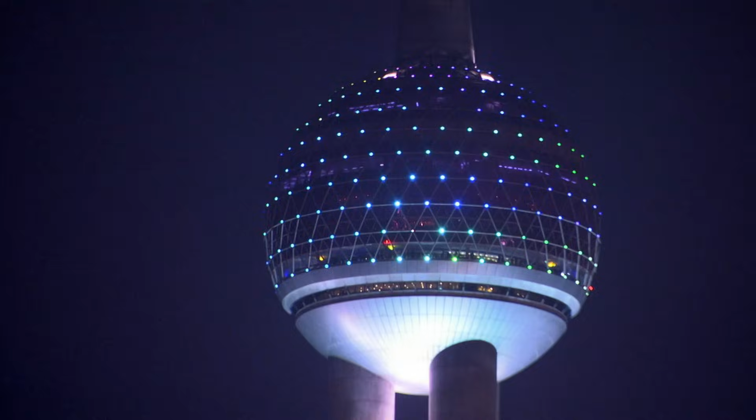China. For thousands of years, it's proclaimed its greatness and power by erecting some of the greatest monuments on Earth. And as China roars back to world power status in the 21st century, it's once again proclaiming its power in steel and concrete, glass and stone.

But even in today's China, it doesn't get any more amazing than this. In Beijing, China's capital, workers are constructing one of the most astonishing buildings ever built. When Beijing lights the Olympic torch, the eyes of the world will be on the incredible National Aquatic Center, a gigantic greenhouse that heats and cools itself, with a skeleton so strong it could stand on end and shrug off an earthquake, and a wafer-thin skin that puts out its own fires.

Can you imagine building a building out of this? Essentially, we're building a building out of bubble wrap, you know? I have to say it's perfect.

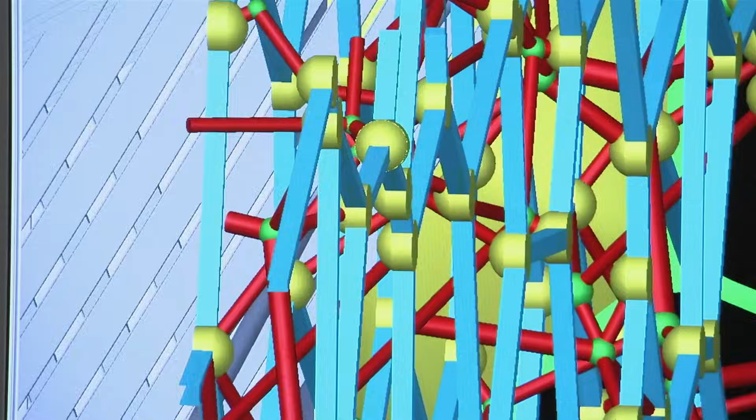What the Olympic crowds won't see is the sweat, brains and guts that got this megastructure built. The struggle to believe in the incredible. I think we're all a bit stunned, really.

But you want to do what? The lives put on hold. My wife didn't want to speak to me for a while.

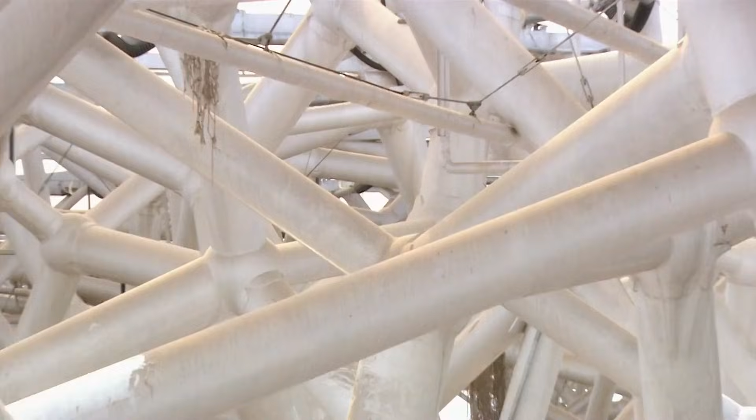And the hard hat high wire acts 30 meters high. It looks a bit crazy, but it is safe. The National Aquatic Centre's a visionary piece of eco-architecture and a brilliant monument to 21st century China. And it's also a tribute to a team that conquered fear and doubt and didn't quit until they'd made the impossible a reality.

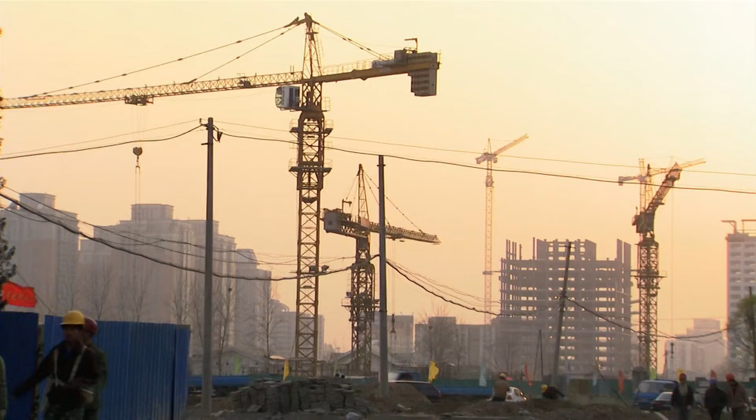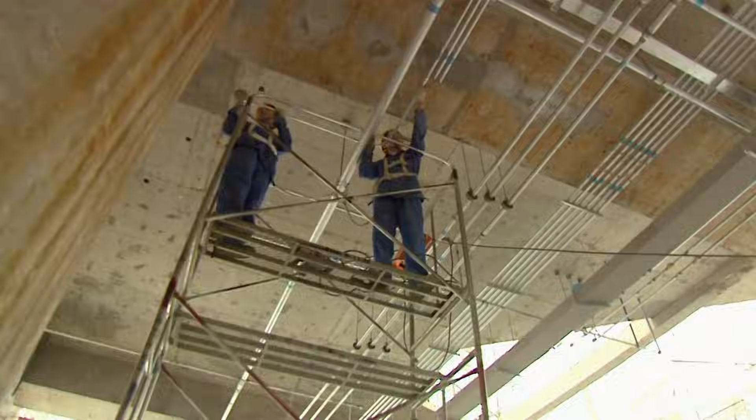Beijing. Building materials arrive at a construction site. Hardly unusual in this construction-crazy town. But these building materials and this building are different. Really different.

90 kilometers of steel, 22,000 beams, following no conventional straight lines, a maze of metal. That's enough steel to circle more than 200 Olympic running tracks. And it's covered with plastic, 100,000 square meters of it, enough to cover 14 full-size rugby pitches, cut into cushions as big as 9 meters in diameter, but only 0.2 of a millimeter thick, nearly 8 times thinner than a penny.

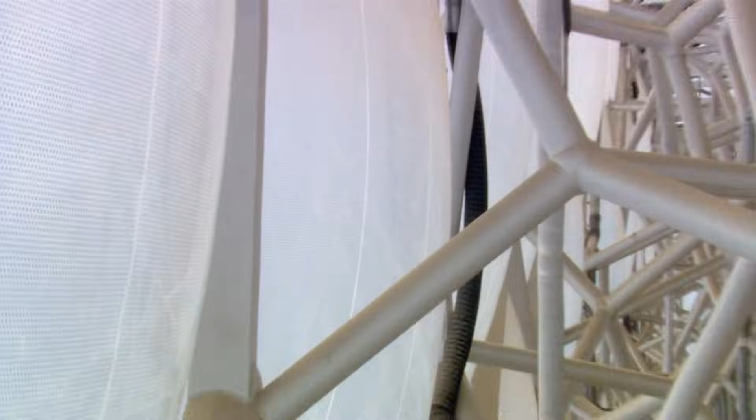Officially, it's called the National Aquatic Center, but in the world of mega architecture, it's known as the water cube. It's a fantastic honeycomb that looks as light and fragile as a tinker toy. But in reality, it weighs 6,500 tons. That's almost as heavy as all the metal in the Eiffel Tower. And inside its walls and ceiling, nothing but air. There is nothing else like it.

Who came up with this amazing building? Engineering team leader, Tristram Carfrae. Architects John Bilmon, Mark Butler and Chris Bosse. Fire engineer Marianne Foley. Structural engineer Mark Arkinstall. Building modeler Stuart Bull. Environmental engineer Haico Schepers. Chinese design team project manager Yi Hongtao. Part of a 100-strong architectural and engineering dream team. A team that envisions the original, the astonishing, and the apparently impossible, and made it into a megastructure.

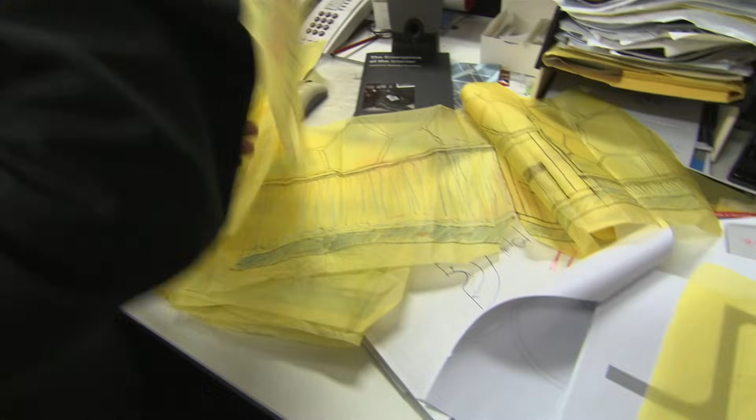Sydney, Australia, 2002. The architectural firm of PTW and the structural engineers of Arup Australia team up with a Chinese consortium led by China State Construction Engineering Corporation and go after one of the world's most coveted construction contracts. From day one, the pressure's on, because they're literally racing the clock. A giant clock in Beijing's Tiananmen Square, counting down the hours and seconds to the 2008 Summer Olympics.

China has invited the world's greatest architects and engineers to transform Beijing into an Olympic host city like none ever seen. The Chinese-Australian team's goal: to design and build the Olympics' prestigious swimming venue. And right away, they run smack into a heart-sinking challenge. The Olympic National Stadium, aka the Bird's Nest. A mind-blowing masterpiece only 1 kilometre from the site where the swimming centre would stand.

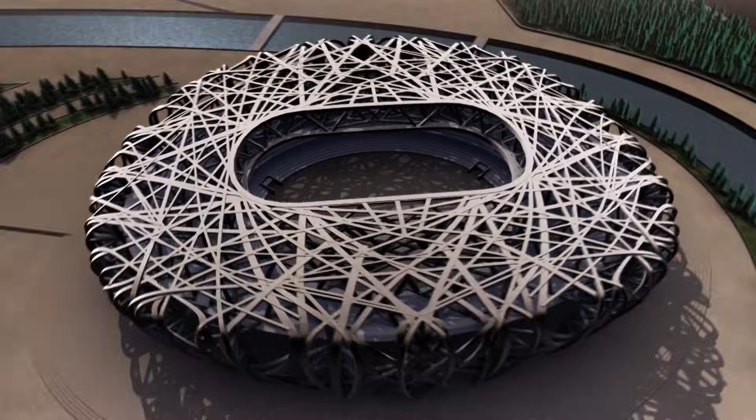When we saw the stadium design, I thought, oh, jeez, how can we match this? We were going to set our aims to create a building that was equal to the stadium, and then we saw the stadium design, and I think all our hearts fell on the ground for that moment. We just thought, oh.

The team searches for a design that will knock the judges' socks off, and searches, and searches, and searches. Then, after nearly six weeks of failure, and with the competition deadline looming, comes the eureka moment.

Soap bubbles. Despite their random appearance, soap bubbles always cling together in regular patterns, in 12 and 14-sided cells, nature's most efficient division of space. And despite their flimsy look, an infinite array of connected soap bubbles has a geometry that's just right for a high-tech building, strong enough to be the model for a megastructure.

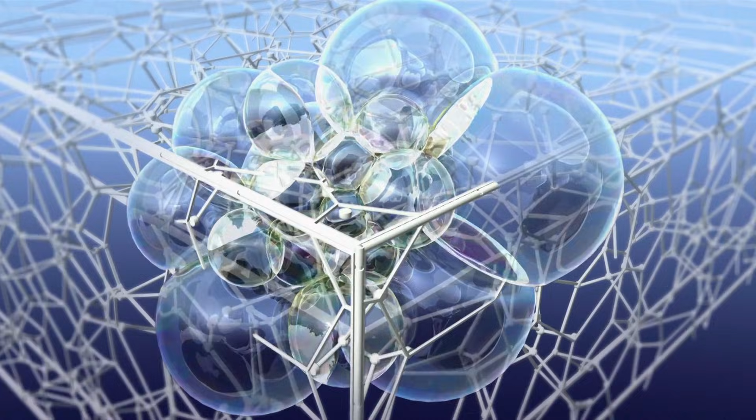Three soap films always come together at 120 degrees, like a Mercedes symbol. And along that line, where the three films come together, there is an axis that we can use as a piece of structure. So we can put a pipe down that line. Those lines always join four to a node. We can stick a joint in, pull in three more pieces, and we get a structure.

At last, the team has a design bold and original enough to win the competition. What they don't have is time.

I probably slept two or three hours a day. I took a nap when I felt tired, and an hour later I'd get up to work. Almost everyone in our team was the same. Everybody's eyes looked like rabbits, very red.

We had tremendous pressure. After we agreed on the Watercube's design, we had five weeks to prepare a building of this complexity. It was extremely hard.

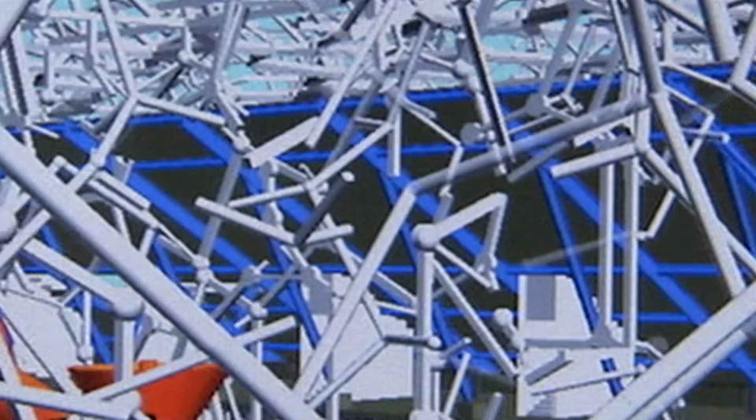Hardest of all was making a model to show the judges what the finished building would look like. No one knew if modeling such a complex building in only five weeks was even possible. We were desperate at the time. We had two weeks to go, and we did not know how we were going to make our model.

In Melbourne, they find a company that's at least willing to try. ARC Australia specializes in a process called rapid prototyping, using a computer-guided laser to carve a model of a new product out of a vat of liquid epoxy, etching it in layers only one hundredth of a centimeter thick. Over the years, most of its clients have asked for models of products like water jugs, toothpaste tubes, and auto racing helmets.

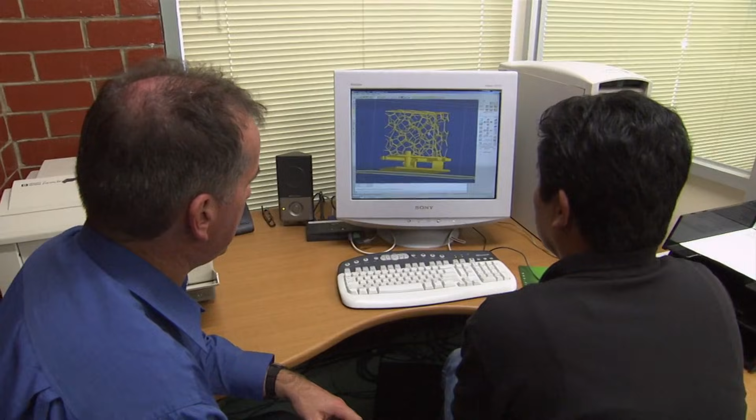Then, in 2003, prototype manager Peter Lucas gets an urgent call from the Watercube team. They'd spoken to other model makers who said they couldn't make this design, so they approached us — it was really their last port of call as far as getting a model made. We wanted to do it because it was a difficult model, something a little different from the normal day-to-day jobs we do.

But within a few days, ARC is pondering that old saying, be careful what you wish for, you might get it. The machine kept crashing. The file was so big, it was like a 20-meg file, and most files we're dealing with are sort of 2 to 5 megs. The darkest hour was when we thought, no, we can't do this.

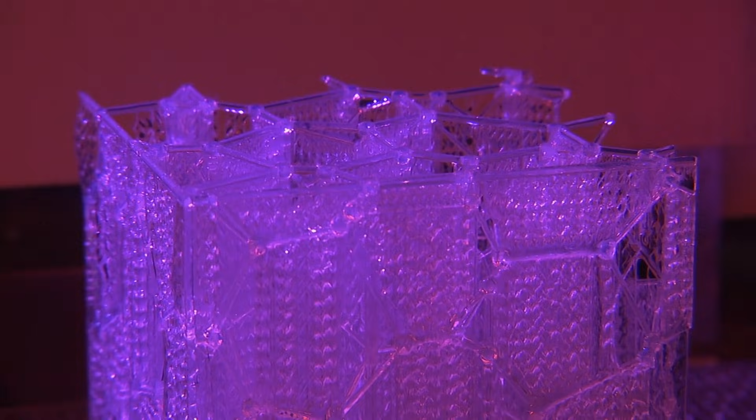So what we decided to do was to grow the Watercube in sections. The architects at PTW came down with hand luggage, and we loaded each section into the hand luggage, and they flew it back to Beijing. I think the time pressure was down to hours at that stage.

The finished model just meets the competition deadline. The team waits for China's decision. They know that losing will be hard, but they also know that winning — and having to build something never built before — might be even harder.

July 2003. After nearly four months of seven-day weeks, working day and night, the Watercube team gets the news. Voting online, the Chinese people have picked the Watercube design to be the Olympic swimming center.

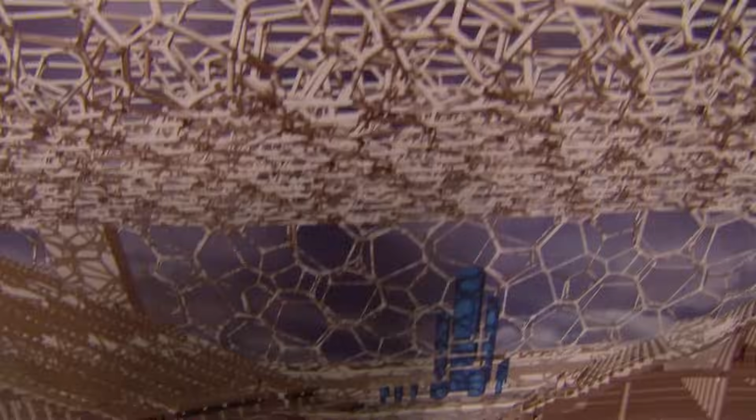The team's reaction: rejoicing, followed by panic. It was really only when they came back from the competition and actually had some images that it hit them — this is what it's going to be. I think we all had in our minds that it was some sort of simpler swimming centre.

I think we're all a bit stunned, really. Like, you want to do what?

There's been an immense effort to win. And when you're in a winning mode, you don't necessarily focus on all the difficulties that are ahead. You want the job — you've won the job — we sit down, we look at it, and there is a bit of a heart sinking, in a sort of, oh my God, can this actually be done?

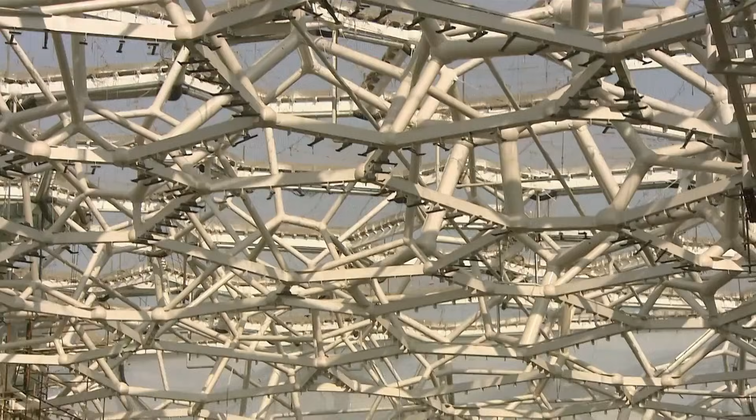And in fact, Chinese authorities were asking the same question. China had voted for a building like no other. Now its designers had to prove they could actually build it.

The Watercube's gigantic steel honeycomb had 22,000 steel beams, following no conventional straight lines — a crazy-looking pattern.

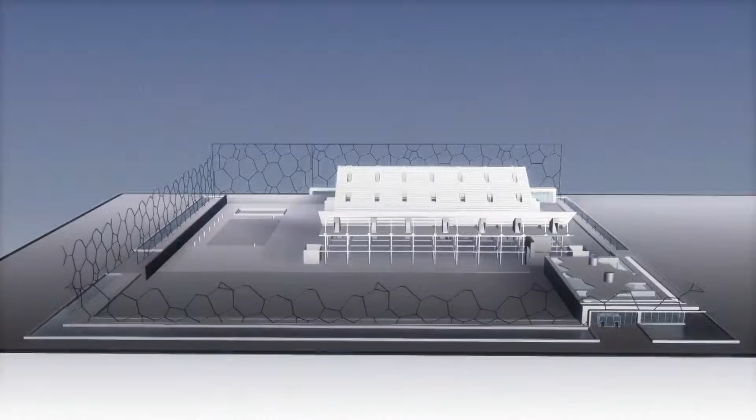Its roof and walls would have to be 100,000 square meters of bubbles, made of something light enough and flexible enough to cover this apparently random maze of steel, but strong enough to stand up to Beijing's desert sandstorms, broiling summers, and sub-freezing winters.

Glass — too heavy and brittle. Concrete — a design disaster. The answer came from way outside the box.

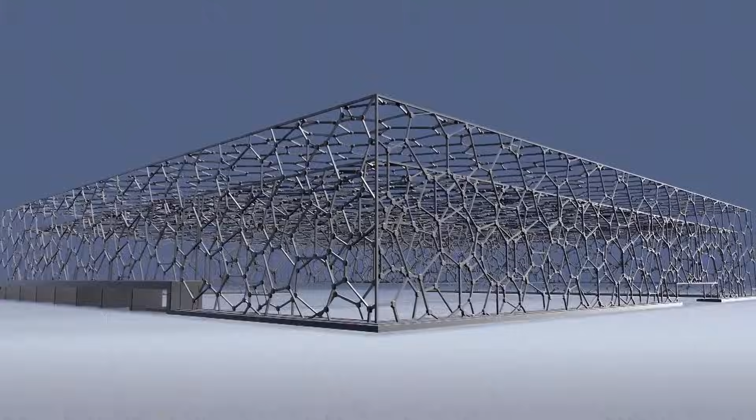Meet the amazing ETFE. That's a piece of ETFE. Fantastic, isn't it? Can you imagine building a building out of this?

ETFE stands for ethylene tetrafluoroethylene. Chemists call it fluoropolymer, the rest of us call it plastic. Essentially, we're building a building out of bubble wrap. It may look like freezer wrap or a dry cleaning bag, but ETFE is a plastic like no other. A plastic with a past.

In 1938, an American chemist at DuPont Chemical Company was experimenting with gases and accidentally created a new substance, known around the world as Teflon. Since 1960, Teflon's helped millions in the kitchen. But most people have no idea it hasn't always been a labor-saving coating on their frying pans.

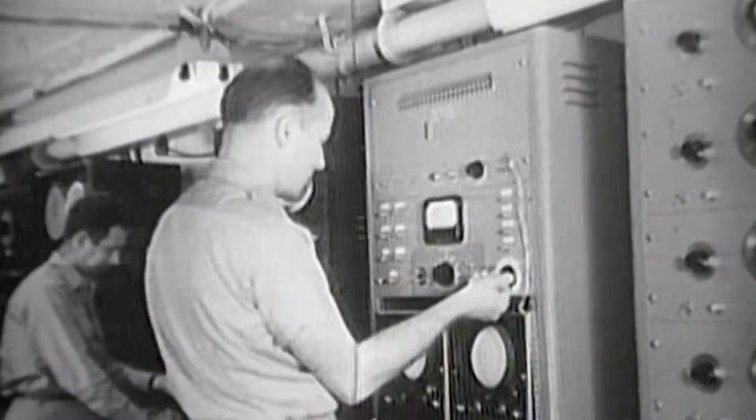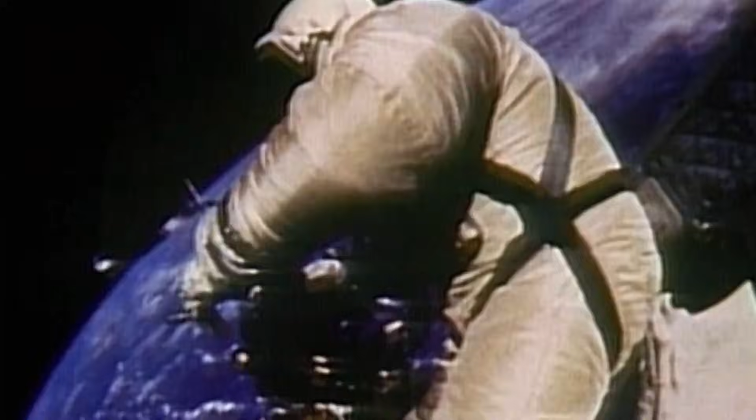By 1970, America was sending spacecraft and astronauts beyond Earth's atmosphere and needed to protect them against cosmic radiation. So NASA and DuPont tweaked Teflon's chemical structure and created ETFE. The 1960s and 70s also saw the rise of the geodesic dome and other architectural innovations, and it wasn't long before architects and engineers grasped ETFE's potential. The miracle plastic that had once helped transform cities into rubble would now help transform them into futurescapes.

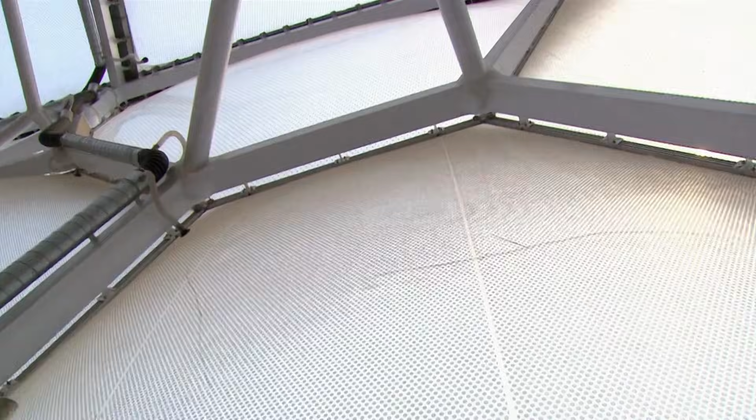The sun's ultraviolet rays can't hurt ETFE. Samples created decades ago still look brand new. It's just 1% of the weight of glass and much more flexible. Incredibly, it's also more transparent than glass and lets in more light. And thanks to its space-age origins, it's a superb insulator.

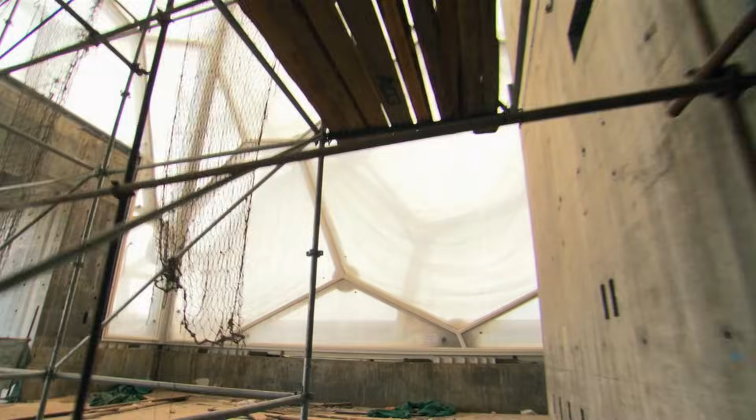Today, ETFE covers some of the world's most impressive structures, like the Eden Project in Cornwall, England, and Munich's Allianz Arena, host site of the 2006 World Cup. But the Water Cube's 100,000 square meters sets the record as the biggest ETFE construction in the world. An impressive statistic that worries Chinese officials. They ask, what will happen if 100,000 square meters of plastic catches fire, with 20,000 Olympic spectators inside?

To win approval for ETFE, Arup's lead fire engineer, Marianne Foley, has to change some minds fast. And the first mind she has to change is her own.

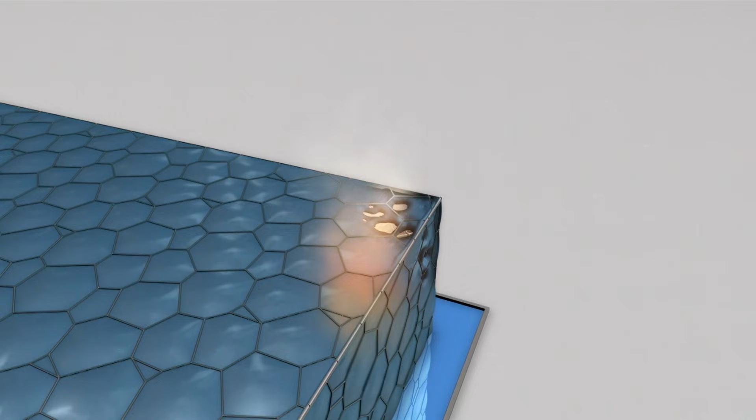When I was first presented with, this is what we're going to do, it's like, you've got to be kidding, you're going to cover the building in plastic. Because, obviously, my thoughts were the typical ones - there's going to be huge flames licking up the side of the building, and that's not going to be good. We all got visions of what plastic may do in the event of fire, envisaging big fires and raining flaming droplets down. And there's plenty of material, plenty of plastics that behave like that.

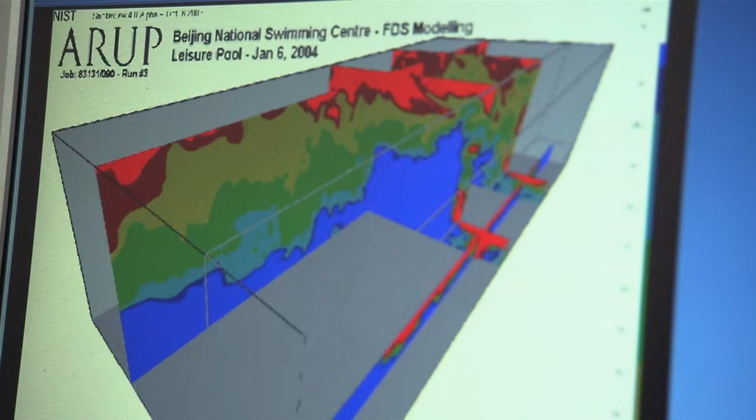But Foley soon discovers that ETFE doesn't behave like other plastics. She researches the worst-case scenario - a fire in the Water Cube with some 20,000 Olympic spectators inside - and asks, what will those 20,000 people see? You're not going to see what the movies show you, for example, of flames licking up the outside of a building, the towering inferno kind of stuff. You're not going to see any of that. I mean, the likelihood actually is you would see nothing at all, which is a terribly boring answer.

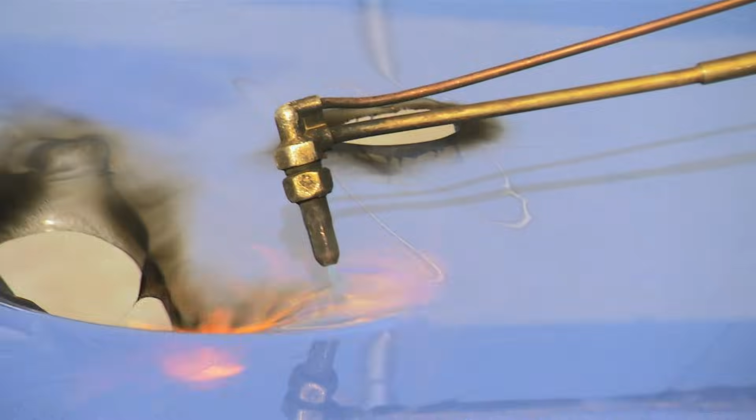Inside the cavernous Water Cube, flames will have a hard time reaching the ETFE skin. But what if they do? At the Water Cube's ETFE factory in Beijing, a demonstration reveals what will happen. If a fire does reach the ETFE skin, the skin won't burst into flame. Instead, ETFE will just melt away. But only as long as the flame stays on it. Take the flame away, the melting instantly stops.

It looks like magic, but ETFE expert James Murphy knows it's just good chemistry. ETFE has a chemical in it, fluorine, sort of like the chemical that's in your toothpaste, and that puts out the flame. The fluorine in the ETFE prevents enough oxygen from being present to sustain fire.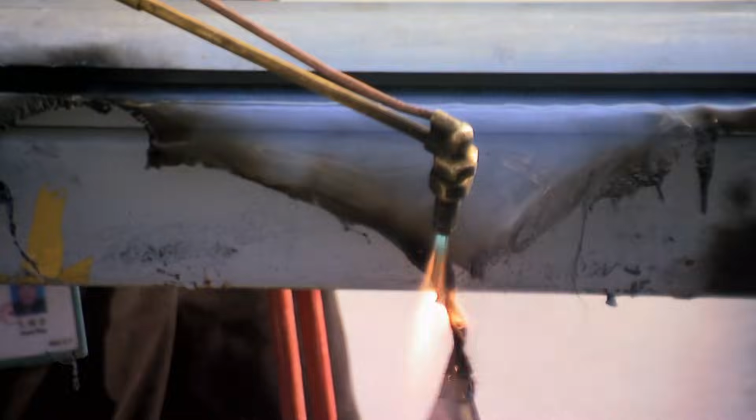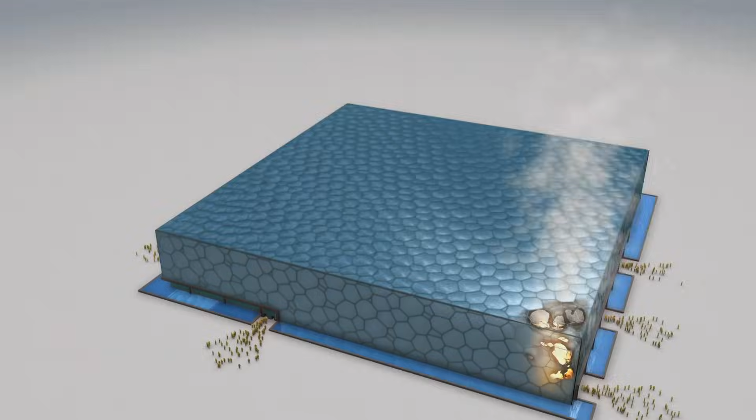No matter how long fire touches it, ETFE doesn't burst into flames. It melts and drops away. That's a big benefit because it allows all the harmful gases and smoke out of the building, and that allows people to see and get out safely. What you're essentially going to see is what looks like a very large piece of cling wrap shriveling away from a lighter flame. It's just going to shrink away, and you're just going to get a hole, and then people evacuating.

The design team proves that if the Watercube's skin caught fire, it will simply wrinkle up and blow away. But what will happen to its immense steel skeleton? A fire can make steel so hot it weakens and gives way.

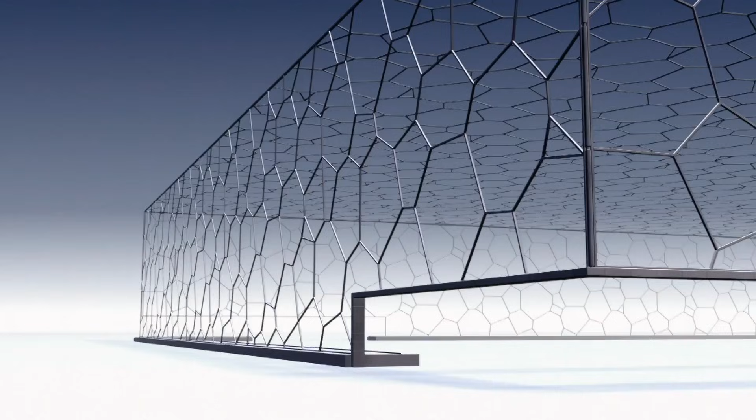China's fire code requires spraying steel with a fire-resistant chemical coating. Very effective, and very ugly. The team argues that given the building's vast amount of visible steel, fireproof slurry will make an Olympic masterpiece look like a gigantic bowl of porridge.

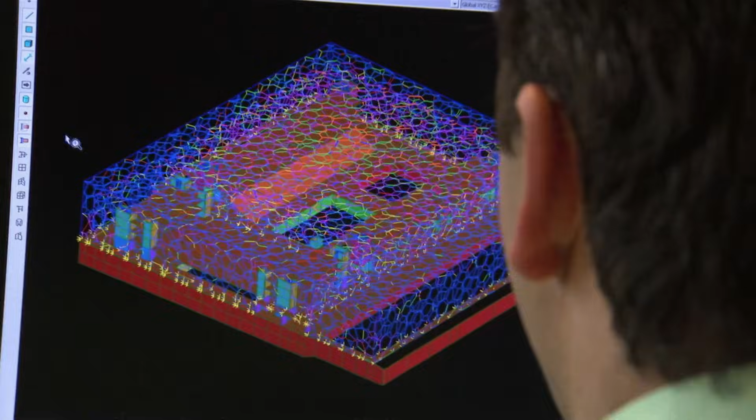It's a terrible material, actually. The idea that we would have had to do that to that building just makes me laugh, because there's just no way. But to win that argument, the Watercube team has to prove that their steel honeycomb will survive a fire on its own.

And that means burning some midnight oil. In here we have the problem with the two beams. We had to look at how fires in the building would affect this very intricate structure. That level of complexity was not something I'd done before, and it's not something you would normally do.

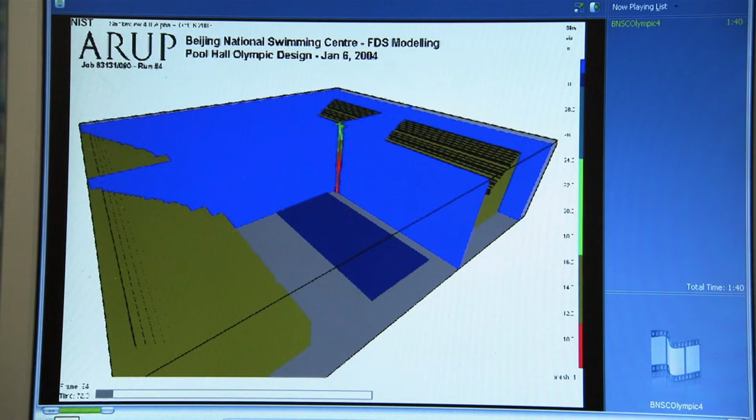Foley painstakingly analyses the Watercube's design to determine where fires are likely to break out and what part of the building will be most vulnerable to fire, while her fellow engineer, Mark Arkenstall, calculates how strong the steel frame will have to be to withstand a fire without a protective coating. My role as fire engineer was to work out what sort of fires we could have, how big they were going to be, how close to the steel they would get, and from that work out what the temperature distribution would be.

So what temperature was it going to be where on that steel? Then Mark took over from there and worked out what that would do to those elements exposed to the high temperature, and where that temperature was such that the element would no longer carry the load. If that stopped doing that, what did the rest of the structure do?

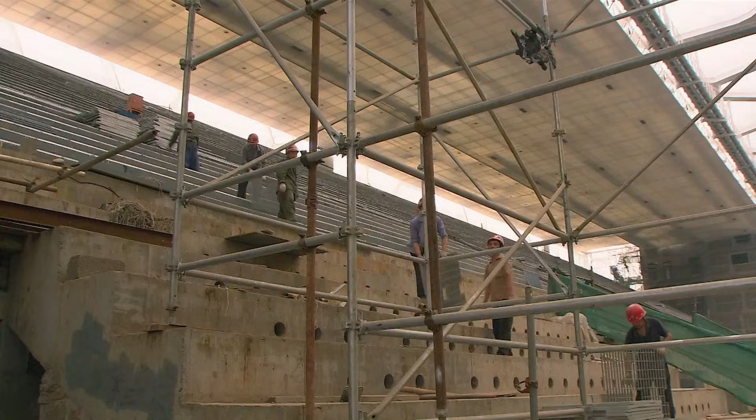To their vast relief, this analysis reveals that the Watercube's steel honeycomb will survive a major fire. If any beams melt in extreme heat, the surrounding beams will shoulder the load and keep the building from collapsing. 20,000 Olympic spectators inside the Watercube are now looking safer.

But the Watercube still has to satisfy one more fire regulation, and it's another potential design wrecker. The Chinese fire code requires a building holding 20,000 people to have 200 meters of exits, nearly the same length as two sides of the Watercube. The code also requires public buildings to have fire-protected enclosed spaces like stairwells leading to fire exits. But the Watercube encloses nothing—inside, it's a vast open space.

So the design team goes back to the drawing board and goes the extra mile to convince authorities that their design is safe.

Even though tests show that ETFE will melt, not burn, and will allow smoke to escape a burning Watercube, Marianne Foley models the probable pathways smoke and flame will take and positions sprinklers and smoke extractors along those routes to make doubly sure that fires will go out and smoke will be sucked out of the building.

She argues that with these extra safeguards in place, enclosed escape routes and 200 meters of exit doors aren't necessary or even effective. People don't actually use those. They don't like them, they don't know where they go, they're afraid of them. We all like to leave a building the same way we came in, or at least a way we've mind-mapped, so we know how to get out, we know where we're going to go, we know what it's going to look like.

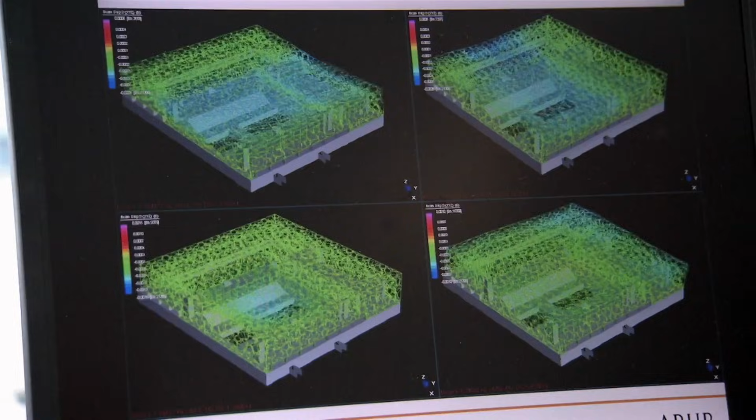But fire isn't the only thing the authorities were worried about. Can the Watercube's gigantic honeycomb survive in one of China's deadliest earthquake zones? There will be plenty more long days and sleepless nights to come.

In 1976, a single earthquake killed 240,000 people, only 180 kilometers from Beijing, where the Olympic Swim Center will stand. With the Olympic countdown clock ticking, the heat is on to prove the water cube can survive an earthquake.

And engineer Mark Arkenstall is definitely feeling that heat. From a structural engineering point of view, we had to be confident that this very complex building would stand up in Beijing with earthquakes, wind, snow, you name it. And it's not just like designing a warehouse. It's actually the water cube. It's just so much more than anything you'll ever see anywhere.

The challenge: how to make the water cube's steel honeycomb strong enough to stand up to high winds, dust storms, snow, and earthquakes, but light enough so it won't collapse under its own weight.

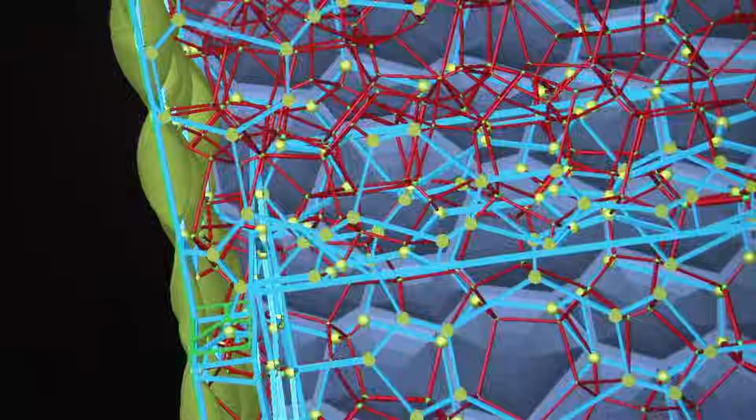After cyber testing 190 different scenarios, the team proves that despite its resemblance to the world's biggest Tinker Toy, the water cube will fare extremely well in an earthquake.

Most big structures in earthquakes resist the forces simply through strength. What happens is that the ground shakes, there's momentum or inertia in the building, and so it has to move with the ground that's shaking, and that creates enormous forces or stresses in the building.

In our case, what we get is that as the ground shakes, the structure goes plastic, that is, the steel begins to yield, it moves the force onto somewhere else. So it redistributes within itself. In fact, the water cube's 22,000 steel beams and joints give it a greater capacity to absorb an earthquake's energy, probably more than any other building ever built.

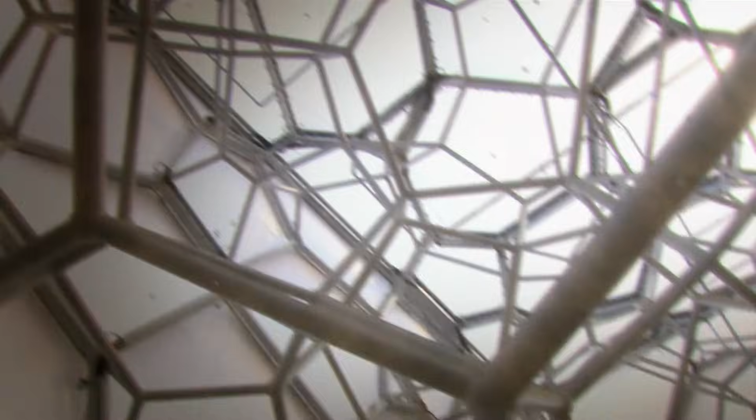But one more challenge remains. The water cube's builders need a 3D computerized blueprint, a virtual model that assembles the entire building in cyberspace.

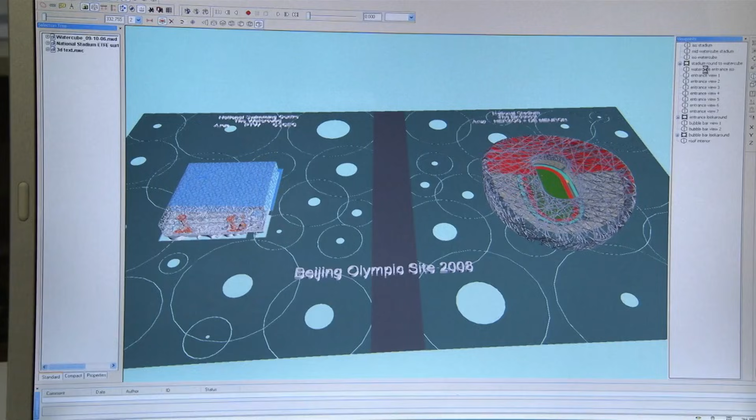It's up to building modeler Stuart Bull to make that happen. I was scared silly. I knew that as the job went further, it would get harder for me personally. Bull has 7 months to accurately model the water cube. That may sound like a lot of time, but not for a building made of 22,000 irregular steel beams.

You then have the stress and thinking, right, I've got to get that done. I've got to get that done now. Why doesn't this work? Go back to the beginning. You get it to work the first time, but it doesn't work the second time. Why doesn't this work? We broke so many computers, they physically stopped working. It was not funny. My wife didn't want to speak to me for a while—just puts me away in the spare room and says, well, you can come out when you're finished.

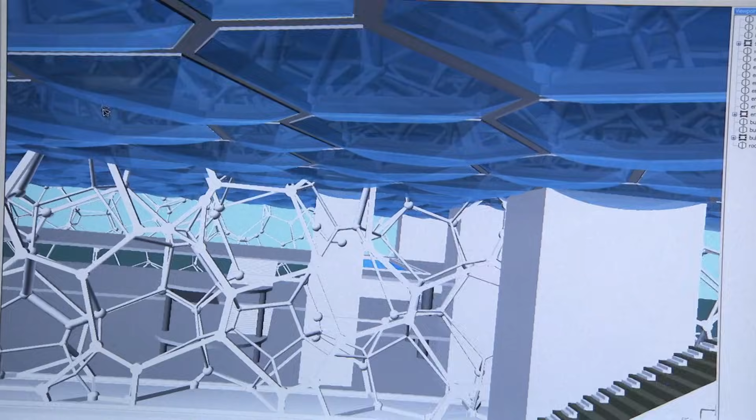Several months and several dead computers later, Stuart Bull is out of the spare room, and the water cube's builders have accurate blueprints. Now, they have to build it.

Construction starts in December 2003. Workers pour the immense foundation, then begin assembling 22,000 beams of steel. It's a mega challenge, and they tackle it head on.

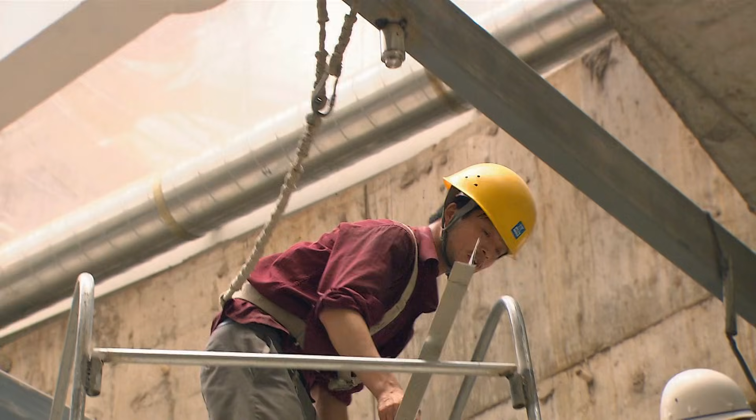The steel structure is very difficult. There are tens of thousands of parts and link points, and you have to put all this together and precisely position them. Because we use high-strength steel instead of usual steel, it became unusually demanding for the welding job. We need to make sure of the quality of welded joints to prevent collapsing.

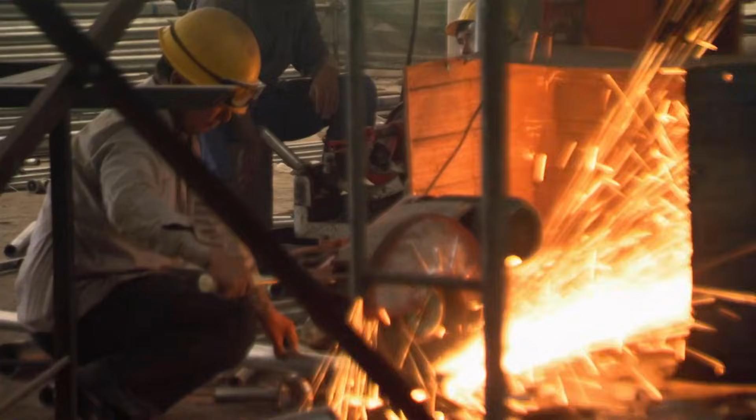If the water cube was to be built in Australia, the UK, or America, the builder most probably would have taken a modular approach, building large segments of the structure and lifting them into place, then welding the seams together. However, in China, an army of welders and workers simply put the beams together, and the structure literally rose out of the ground and marched up the walls and across the roof and down the other side, and then it was built.

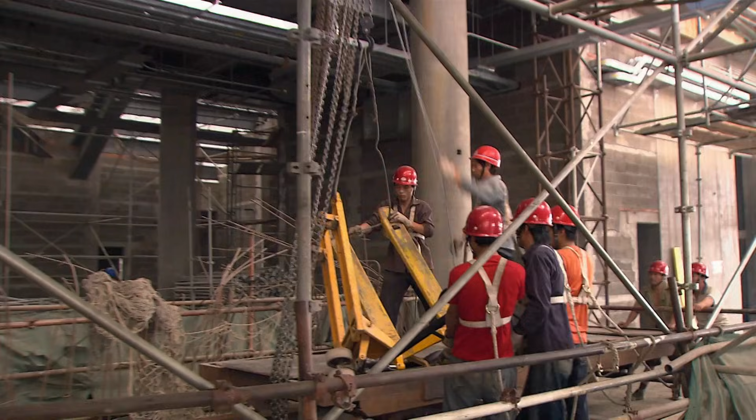By August 2005, the water cube's gigantic steel lattice looms above the Olympic green. It's time to cover it with ETFE. While building its massive skeleton calls for heavy lifting, manufacturing its super thin, super light skin requires some serious mental gymnastics.

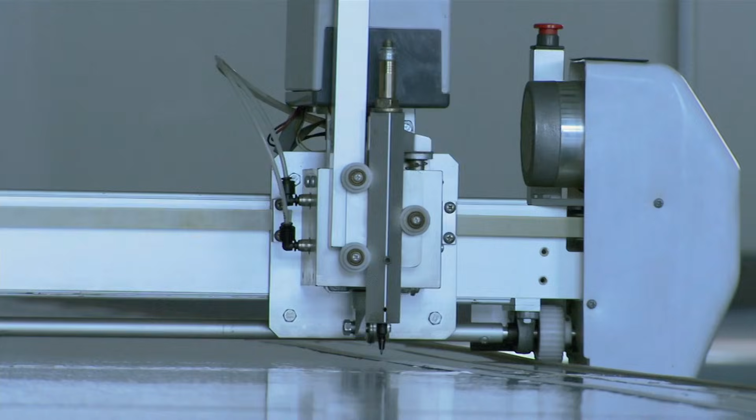At this Beijing factory, workers are transforming huge sheets of ETFE into 3,500 water cube pillows, every one designed in Germany.

In Beijing, technicians translate each pillow's unique dimensions from a German computer program to a Chinese database, calculating how to cut each piece of ETFE with the least wasted material. Other workers stretch huge sheets of ETFE over a giant vacuum table, sealing them flush with the surface. Then the computer program guides a blade as it cuts each pillow to its exact dimensions.

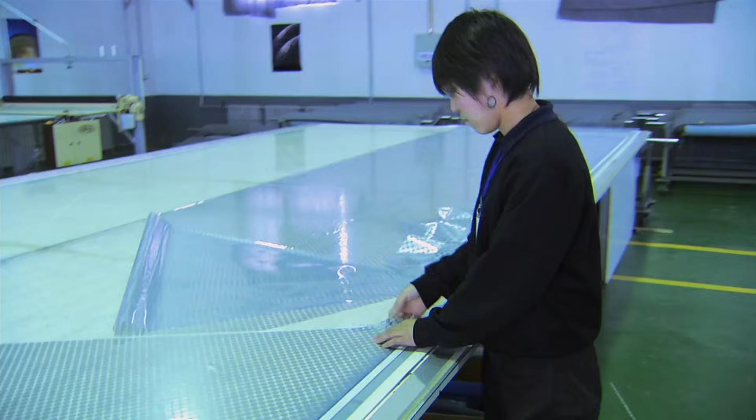Every finished pillow must be exactly as it was designed. For factory owner Stefan Lienert, that meant some sleepless nights when manufacturing began.

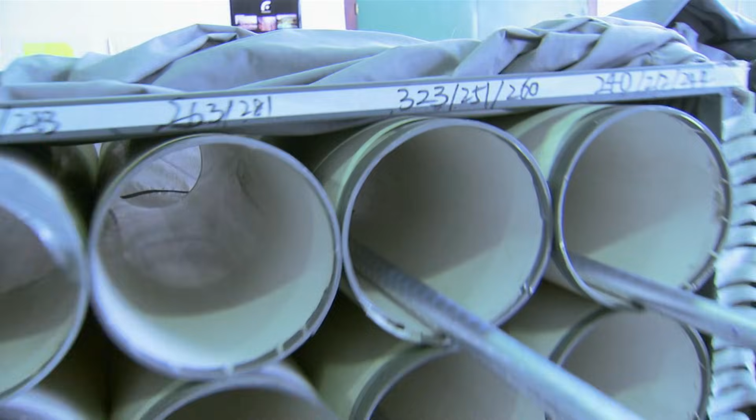The thing is to have these cushions, every one of them, manufactured to the precise dimension, have it done on the right day, in the right position, for the team to be installed in time. If there was one thing wrong, it would have been wrong for every single cushion, which would have been a technical disaster, but also a financial disaster. Luckily enough, our programs seemed to be all right, so everything did fit. Out of the 3,500 cushions, we had to do one new cushion, because we did make one production error.

From the moment they're cut to shape, keeping track of the pillow pieces becomes an obsession. They're numbered to match the water cube blueprint and stored in identically numbered bins. Workers weld a rope into each pillow's edges so that they can be clamped into an aluminium frame.

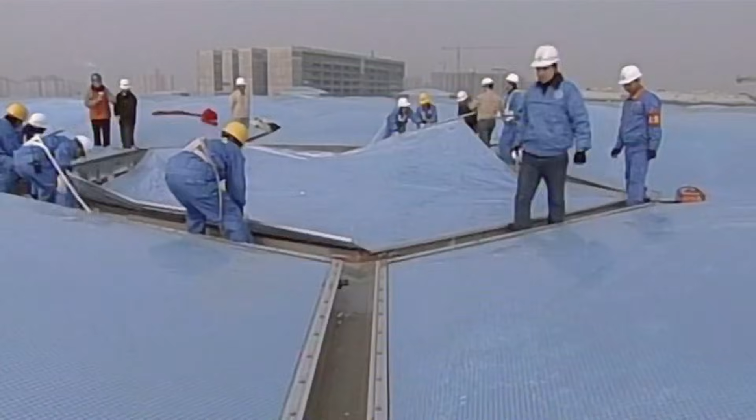Last step, quality control. The factory tests, installs and inflates every pillow. If anything's wrong, now's the time to find out, before it's delivered to the water cube. Every mistake costs time, and time is running out. Installing the water cube's 100,000 square meters of ETFE pillows isn't any easier than making them.

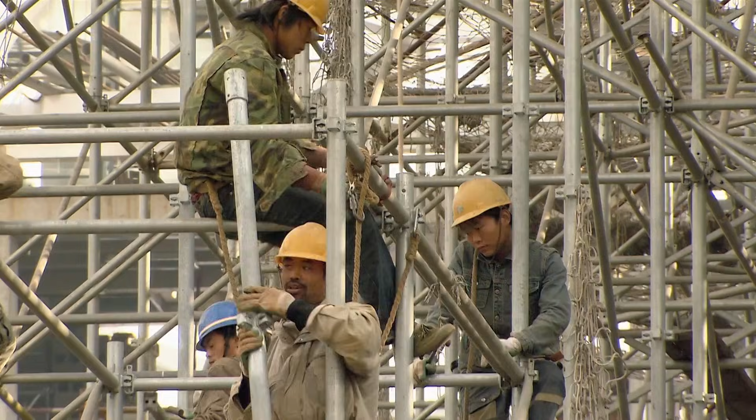James Murphy manages ETFE production and installation for the water cube. To get his ETFE pillows to their positions, workers must erect a massive scaffold out of hundreds of thousands of pipes. We built a rolling scaffold, and we do literally one-third of the building. We put these rails in place, we finish our work in this area, and then we push all of the scaffold forward on the rail. And then we mobilize in that area, we finish that work, and we repeat the process again.

The scaffold is safe. It looks a bit crazy, but we've been at it now two and a half years, so it is safe.

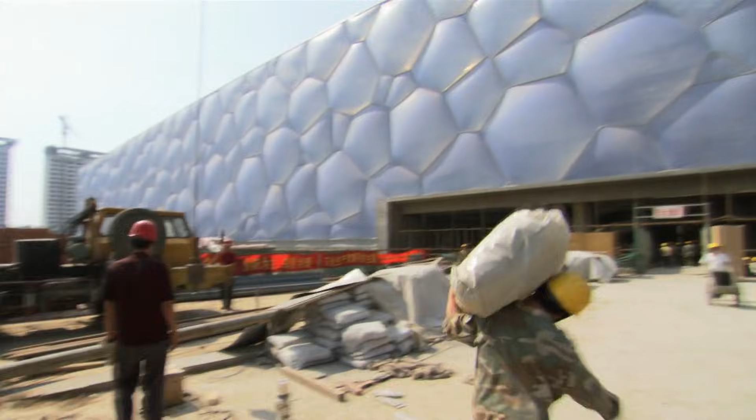Once the scaffold's in place, installation begins with some low-tech sweat and muscle, as workers hand carry the ETFE pillows over 30 meters up. And they do sweat. At the top of the scaffold, the temperature under the roof is about 10 degrees hotter than the floor where they started. In summer, it can reach over 50 degrees. In this often searing heat, workers must carefully complete the complex process of blowing some of the world's biggest bubbles.

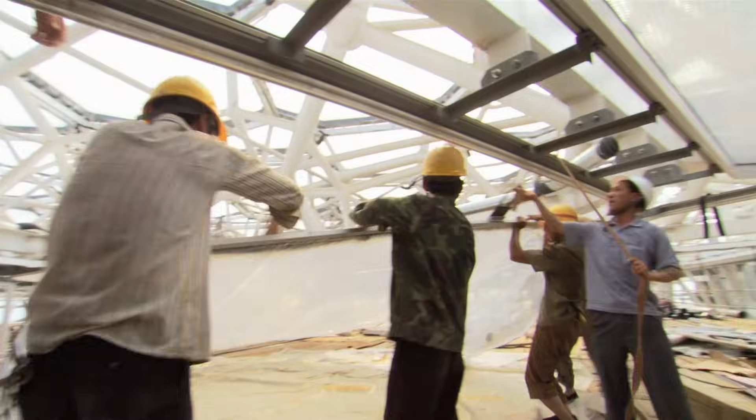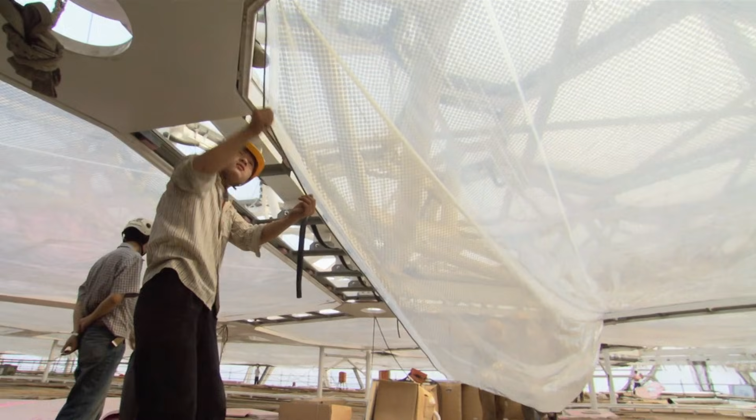First step, unfold the ETFE pillow and rotate it until it matches up with the frame and the steel structure it was designed to fit. Next step, clip the pillow into the framework, a critical step that's got to be done right, because the steel frame stretches the installed pillows tight in a gigantic web, balancing force and counterforce.

You can get the equivalent of, every three feet or a meter, about the weight of one Volkswagen Beetle pulling horizontally. That force is balanced, counterbalanced by a force from this other cushion over here coming through that bracket. So everything balances out, and that makes it an extremely efficient system. Building the water cube means doing this 3,500 times, an impressive amount of work.

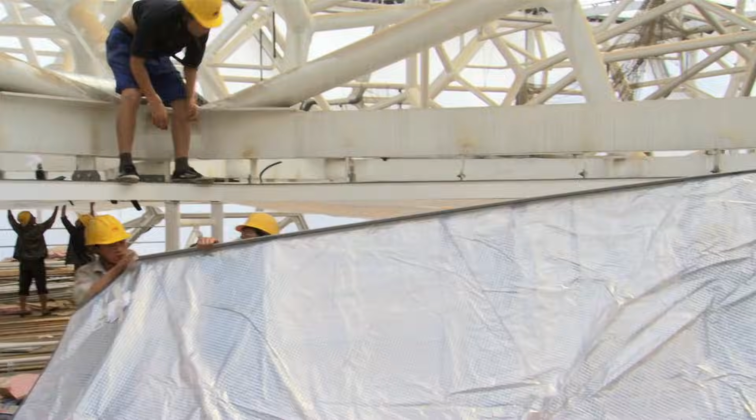But it's the pillow inflation system that reveals some of the water cube's most ingenious eco-engineering. Air is part of the structure. The cushion is not a structural cushion without air. So air keeps our building up, which is fundamentally different from all other building systems used in the world today.

Believe it or not, it's a very small amount of air, so that makes the power consumption extremely low, equivalent to your refrigerator in the kitchen. So you get very large surface areas of cushions filled with air very cheaply.

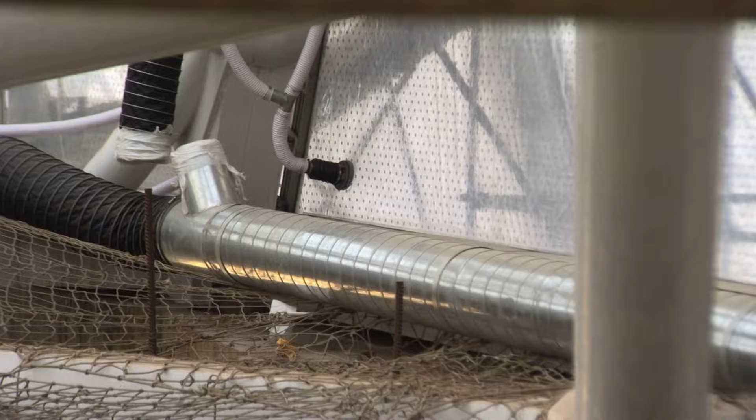At the base we have a big pipe that branches into a smaller pipe, and the further we go up it gets smaller. That's mainly to save on materials and to make the building more environmentally friendly, not to dump energy into the materials when it's not required.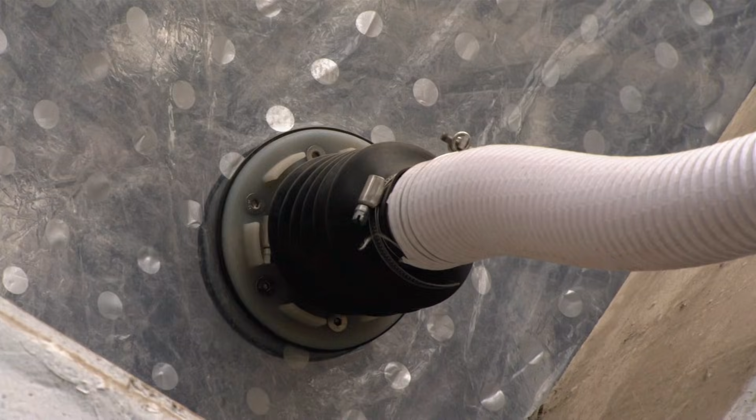A building that's 30 meters high and 70,000 meters square must surely need an energy-gulping mega pump to keep 3,500 pillows inflated. Wrong. The water cube's divided into 18 inflation zones. Each zone has its own fans that send air to its cushions. A sensor in each zone signals the fans if the pillows need more air, or if it's fully inflated, turning the fans on or off as needed, using no more than the minimum required energy.

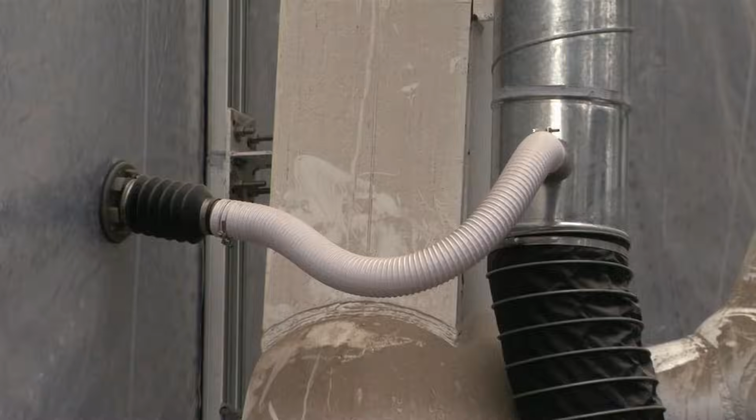An inflation system that can keep 100,000 square meters of ETFE inflated at just the right pressure, without wasting energy, is good engineering indeed.

But the building's most environmentally friendly feature doesn't need any hardware to happen. One of the key things when we design a sustainable building is we actually look at the climate. In Beijing it gets to minus 13 degrees. And that's a problem, because after the Olympics, the water cube will be Beijing's year-round swimming center.

You can imagine minus 13 degrees and everybody's running around almost naked. So it needs to be very warm in that space. It just makes a lot of sense to design a greenhouse to heat everything up under those conditions.

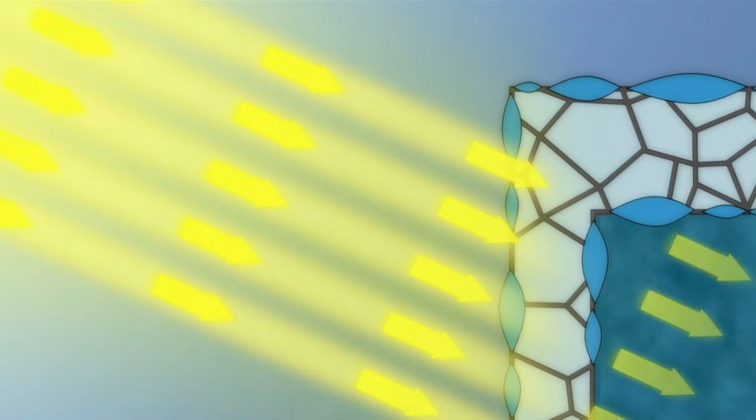Thanks to ETFE, heating the water cube in winter won't be a problem. Building its roof out of ETFE cushions will be as energy efficient as building it out of solar panels. The ETFE's skin will trap 20% of the solar energy falling on the building and use it to heat the interior and the swimming pools, and let in so much daylight that some areas will save over 50% of their normal lighting bill.

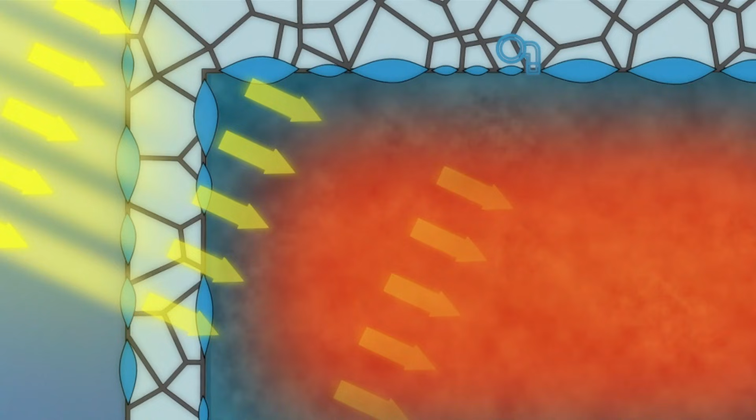Why did we use the transparent cushions? So that the interior could be lit by daylight until very late in the day. It saves a lot of lighting cost. At the same time, the sunlight can heat up the water as well as the interior temperature. We estimated that we can save up to 30% of energy than a conventional stadium.

ETFE's greenhouse effect makes the water cube a brilliantly sustainable building, but only for half the year. Our problem is actually more to do in summer when it is 31 degrees in Beijing, and how do we make sure it doesn't get too hot in the space. The same greenhouse effect that makes the water cube cozy in winter makes it an oven in summer. Somehow, it has to cool itself as sustainably as it heats itself, without using too much energy.

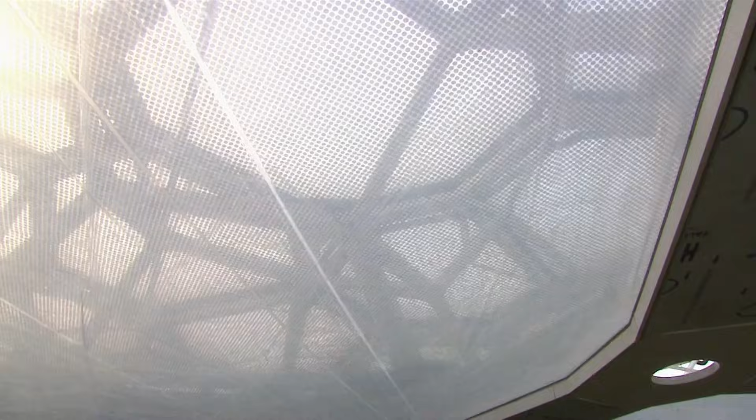And that's where these dots come in. They look unremarkable, but don't judge them by their looks. Thanks to these dot patterns built into its skin, the water cube can efficiently regulate its temperature, keeping cool in blazing summers with minimal help from air conditioning.

The dots reflect solar energy away while letting daylight in. The thicker the dot pattern, the more heat stays out. The thinner the pattern, the more heat gets in. And how thick or thin the pattern depends on where it is.

We change the amount of print on each cushion based upon what activity is happening in the room. We're standing in a place that will be a bar eventually, so during the day people will be sitting down relaxing. They don't want to be overheated by the sun energy coming in and making the place uncomfortable. So we put a very high density, many dots close together, up to 55 or 60% of the surface area in these areas, which allows us to reduce the cooling load by up to 40%, which is extremely efficient.

So when you look around the building in here, we have less than 20% frit on this cushion. On the outside we have 50%, and then around the structure we have about 10%, which again optimizes every part of the building to reflect out that heat energy from the sun, but to let in the light energy to cut down on the artificial lighting needs for the building.

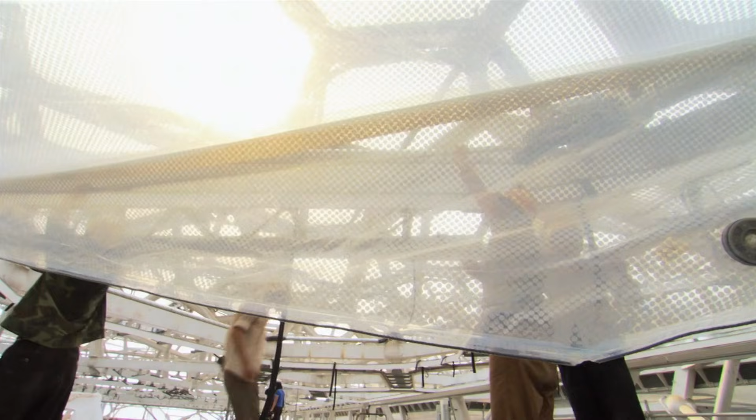And that is basically the magic and wonder of print on ETFE cushions. There's one more way that ETFE makes the Water Cube a wonder of sustainable architecture, something that explains why these workers have to toil in temperatures up to 50 degrees. When it's finished, the ceiling they're installing will be where the Water Cube stores its own self-generated energy between outer and inner layers of ETFE.

We have two skins of these ETFE bubbles, and we capture the energy in between the two skins. In winter, that energy stays where it is. We essentially seal the whole box and capture all that energy. In summer, we ventilate that out. We open up the ETFE bubbles at low level and high level, and we flush that energy back out of the building.

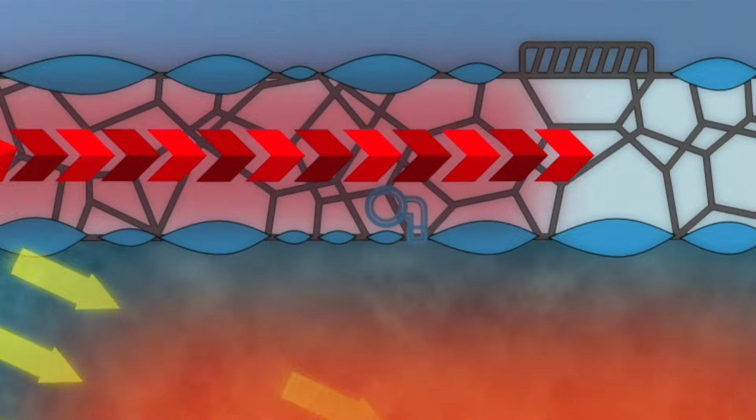We have seat fans for audiences. It only lowers the temperature within the spectator area. The athletes won't be affected—they are quite sensitive to temperature change. Also, our natural ventilation solution helps exchange air between inside and outside. We save heat to heat up the pool, and we also save rainfall for the water.

ETFE seems invincible, but even this super plastic has an Achilles heel. ETFE can withstand decades of ultraviolet radiation and heavy loads of wind and snow, but it's so thin you can cut it with a knife.

Maintaining a building made of 100,000 square meters of wafer-thin plastic in a hot, cold, wet, dusty, polluted urban world requires some special attention and some special training. Water Cube maintenance isn't like caring for other buildings, and it's not for the timid.

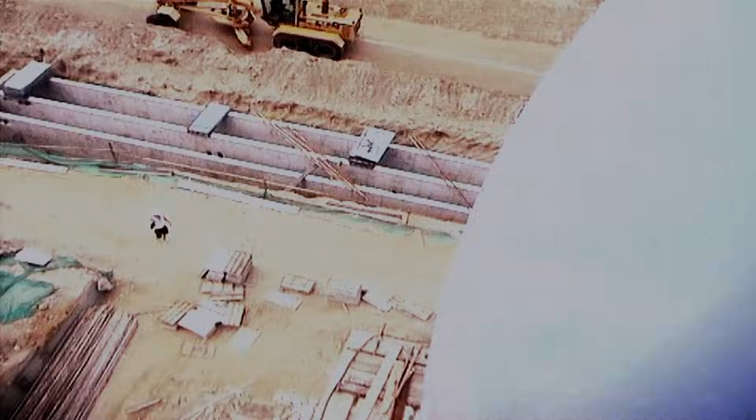ETFE supplier Vector Foiltech trained a special Chinese team of abseilers to inspect and repair the outside pillows. Today, one of those workers finds and fixes a small hole torn in a pillow when a water cannon sprayed the building to wash away Beijing's formidable dust.

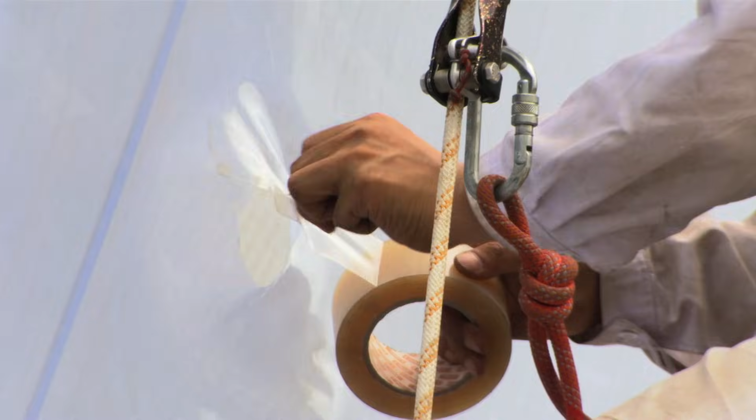But even in ETFE's fragility, its champions see its strength. Typically, when you aim a water cannon from a fire engine at any building, it tends to break, and usually it would knock a wall down. A masonry wall would be totally knocked down, but our cushion had a small hole and kept on going about its business as though nothing had happened.

So what we've done now is just come down on the side of the building to create a temporary patch to stop rainwater going into the building. We will then come back with a much neater patch and reapply it, and over time you won't even see the patch. The cushion has this self-healing property because it's under pressure. That's the great advantage of ETFE—we can just make a small repair, the building keeps on going in operation, whereas if it was glass or another material, you would have to completely replace that panel, and it would be a major operation.

Summer 2007. Inside the Water Cube, workers install and inflate the final ETFE pillows. Outside, its finished walls and roof are already revealing what a mind-blowing masterpiece the National Aquatic Centre will be.

I don't think anybody would have walked away from this project from day one, no matter what they may have thought in their own private world—this is too hard, or this is too scary. Everybody wanted to get to the end and achieve what we thought at the beginning was the impossible. To be honest, I actually don't know to this day how we did it. It was just such an extraordinary thing. You don't get great building designs if you do what's easy.

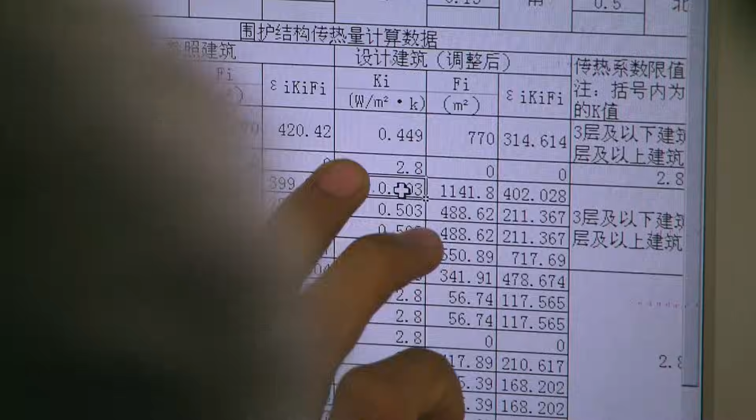When the Water Cube's finished, China will proudly unveil its latest wonder of the world. It is funded by Chinese all over the world. It represents their hopes and dreams for the Chinese Olympics. Its design is under Chinese leadership, which is not common for iconic buildings. Its construction is totally by Chinese, achieved by our own innovation. So it is something to be proud of.

Experts like Tsinghua University's Zhou Rong are already declaring the Water Cube as great as the monuments of the past, but brilliantly proclaiming the China of today. In the 21st century, we should see the Water Cube as a modern-day equivalent of the Forbidden City and the Great Wall.

Unlike the Great Wall, the Water Cube is really transparent—you can see through it. And that really is a new image for China. Now the Water Cube will represent that image to the outside world.

I have to say it's perfect. Okay.

On day one of the Beijing Olympics, athletes, spectators, and TV viewers everywhere will marvel at this megastructure like no other. And all the people who worked so long and so hard to dream it and build it can finally relax.